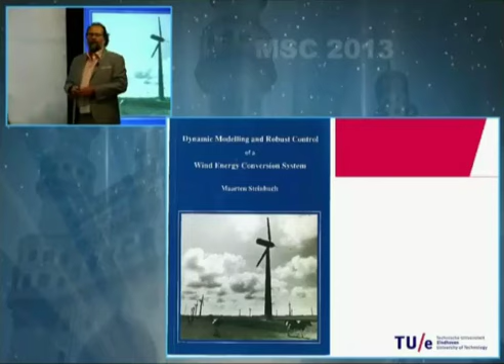After my PhD I went to Philips Research, and started to work there on CD players. After that I worked on wafer scanners, and in fact 14 years ago I moved to Eindhoven University of Technology, and I still work on wafer scanners because that has become a booming business, especially for our field of control, because they really need us. In addition, I did a lot of other applications within my group, like electron microscopes, robots for care and cure. We are also doing activities in my group on energy management and design of hybrid powertrains for trucks and passenger cars. So I will be talking about smart vehicles and also connected vehicles, and I will say a few words about plasma fusion as a new activity in my group.

Now, when I started to work with Philips, they asked me, in the late 80s, to develop possibilities to increase the data amount and data readout speed of CD players from nominal speed, audio, up to 4 times at that time, for the usage of CDs in computer applications.

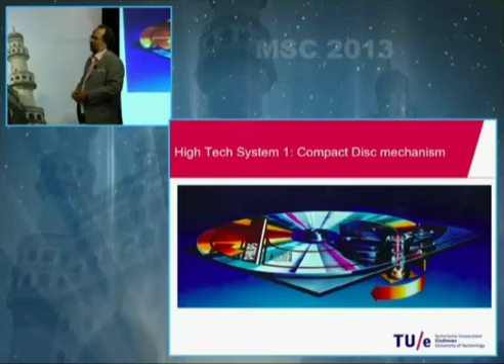The problem is that if you have a track following system, because the CD player typically has to follow the track and the focus - these are two typically controlled mechanisms. On top there is a lens system, and there are coils around the lens and a magnet close to it, so you have a voice-coil actuator and you can control that position. You measure the errors via the laser, and then you have a feedback loop closing that.

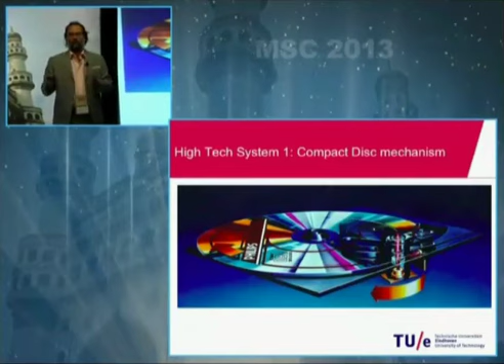Now if you speed up the disc, your set point spectrum is also amplified with a factor 4 in frequency scale, because you simply spin up the disc 4 times. You cannot measure the actual set point, because that's the absolute position of the disc in space. So you can only measure the error, meaning you cannot apply feed forward, only feedback. So if you increase speed by 4, the bandwidth should normally go up by a factor of 4. If the bandwidth typically is about 600 Hertz at that time, you can see what the problem is.

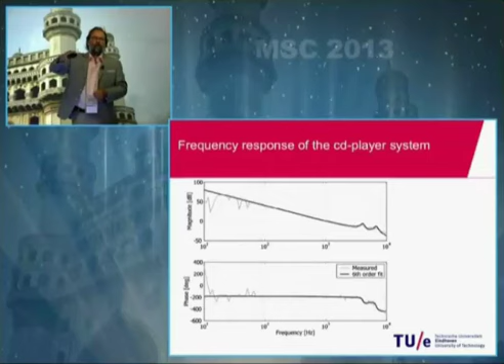This is the Bode plot of the open loop response of the radial tracking: voltage into the actuator, which means current, which means force, and then you measure position relative to the track, which means the law of Newton, F equals m times acceleration. So in the Bode plot from force to position, you basically see a -2 slope, 40 decibels per decade, and at higher frequencies you see resonances.

Now you can imagine, the X scale is in Hertz, if you have 600 Hertz bandwidth and you multiply that by 4, you would have 2400 Hertz bandwidth, somewhere here, somewhere here, and then you are so close to flexibilities that you basically cannot do that with any robustness anymore, even if you apply sort of wide notches, then you lose too much phase.

So we were asked to be more clever than PID controllers, and then I started to work on H infinity and mu synthesis and modeling uncertainties and all the things. But at a certain time I took a more

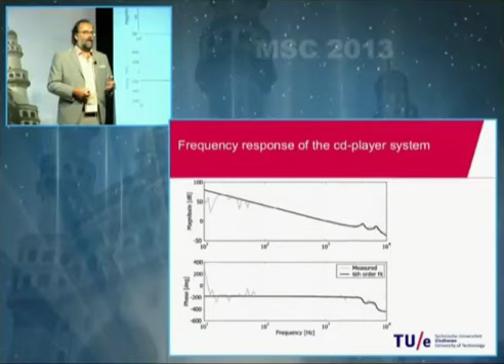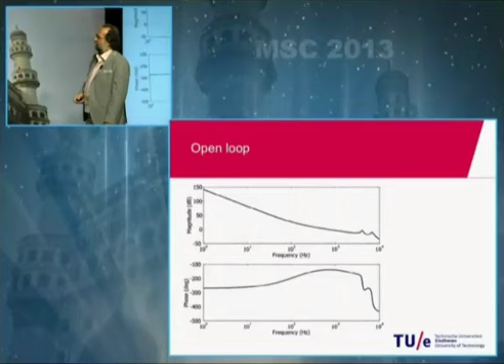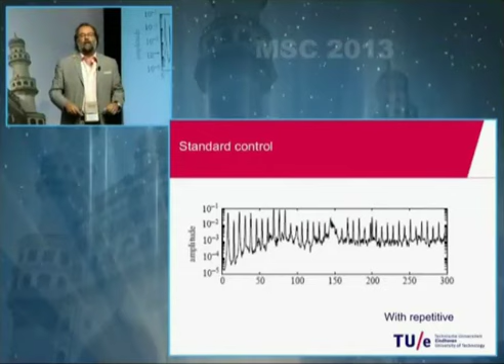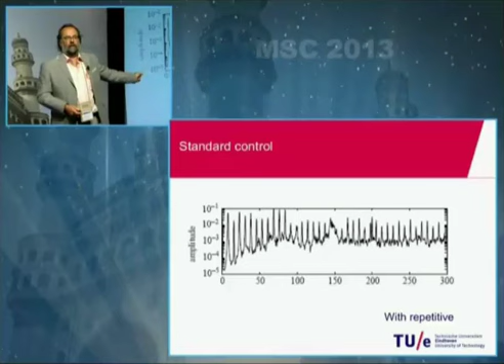So you will see a lot of higher harmonics, at least 20 harmonics. Now the PID controller did not make use of this knowledge, which is very stupid if you look at this spectrum, right? So what we developed then, and of course it was already known in literature before that time, I did this in '89 or '90, is to apply a repetitive controller, right?

The ball game is only to look at the error spectrum and try to learn from the data of your system. Now that brought me also very close to fighting basically the Bode sensitivity integral, because this is what limits our capabilities as control engineers. You have to obey this law for relative second order systems or more, for any causal system. And for linear systems it's well described using frequency domain terms, but for nonlinear systems which are causal, of course, similar things should hold.

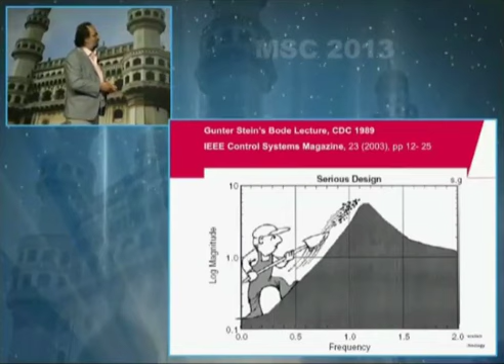The Bode sensitivity integral is central in my work and the lines of research I developed. It's good for us every day to think about the basic principle of feedback, which is the principle of high gain feedback.

Given a plant and a disturbance, the open loop response is G times D. If you close the loop, the closed loop response from disturbance to Y is the process sensitivity: G times 1 over 1 plus GK, which is the sensitivity. If you have high gain, at least below the bandwidth, GK is much larger than 1, so this is approximately 1 over K. The higher the gain, the smaller the output, and ultimately it will be 0.

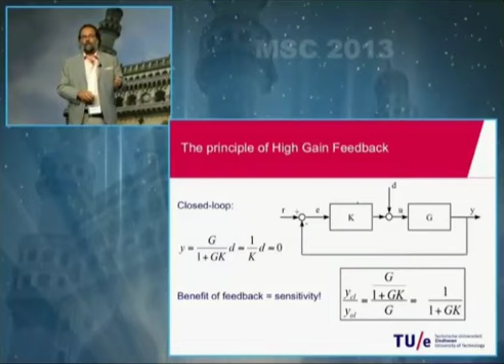This is the principle of high gain feedback, and the benefit of feedback. The ratio of the closed loop expression over the open loop expression - G was the open loop, this is the closed loop - if you divide the two, you get the sensitivity function. The sensitivity function exactly gives you the benefit of the feedback you designed. If it's smaller than 1, you've done a great job. If it's larger than 1, you're stupid to apply feedback.

Looking at this plot, the area above 1 is not good - you amplify disturbances, we all know this. We cannot stop the controller there, that would be an unstable system. So the controller works for all frequencies, and whenever we improve performance at low frequencies, it deteriorates elsewhere. The whole game is to get the sensitivity dirt from one place to another where it doesn't hurt because you don't have disturbances there. That's why disturbance analysis is key.

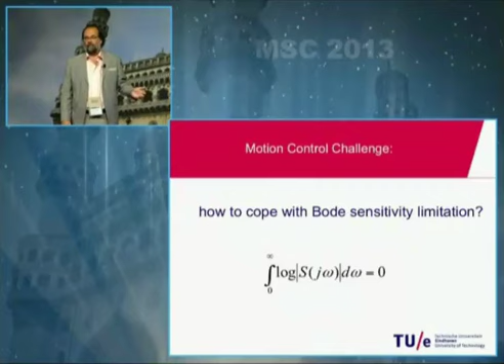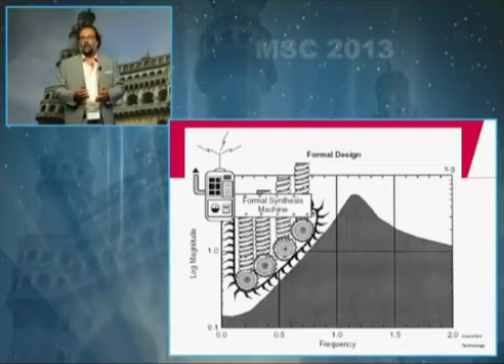One thought is how to cope with this Bode sensitivity - can we in fact beat Bode, can we crack this law, can we circumvent this? Some people in the 80s thought H infinity or LQG would solve all problems, which is not true. If you use an observer, it's simply a filter, you have to obey Bode sensitivity. So an LQG or H infinity design also uses the Bode sensitivity or has to cope with it. It's more formal, you can play with weighting functions, but the trade-off you have to make is exactly the same.

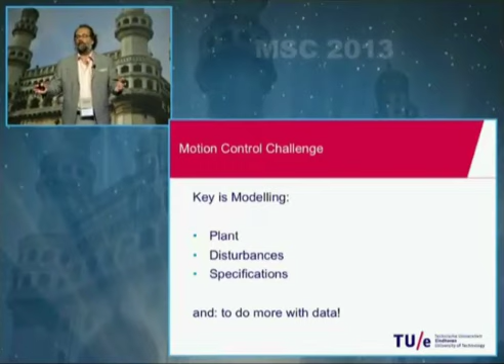What I learned in my time at Philips, working with real applications, is that in academia we put too much focus on plant modeling, restricting the definition of plant to the system to be controlled. But we should include specifications modeling and disturbance modeling - there's too little literature about how to do that. And also to do more with data. It's so cheap to do experiments with motion systems: if you have a sampling frequency of 10 kilohertz, 1 second gives you 10,000 data samples. In process industry, one step response takes half a day. So for motion systems, it's very cheap to use data.

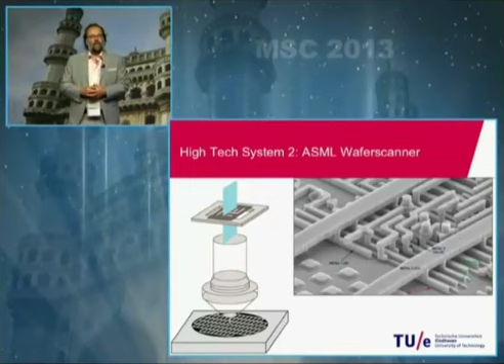Now I want to skip to ASML wafer scanners as an example where we use all these insights, and I'll show you one of the most relevant issues we are currently coping with. A wafer scanner is used in chip manufacturing, and I have a nice movie about it. I hope the sound will work.

What you see in the movie is basically the making of a chip. You take a silicon structure and make slices of that - you call them wafers. You put them into a machine and do a lithographic process. It's a scanning motion, and during that motion, the image from the upper part of the machine, the original...

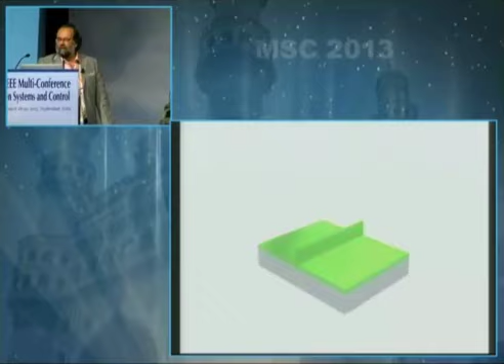Yes, that's the sound, that's good. It's not relevant for the rest, but it's something. If you keep the volume, I will play with the volume. Okay, I need the sound later on for other videos.

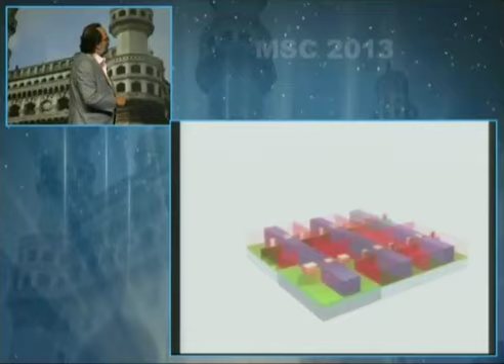This is the building of a 3D structure into chips. These structures are becoming more and more difficult, and the specifications are really going down, down, down. For every layer, this wafer has to go into the machine for the lithographic process. If it's finished, it's taken out into a chemical system, a new layer is spread on it, then taken out of the ovens and back into the machine. That is repeated 20 to 40 times, so you take those wafers out and back in. Then you require that the chip has accuracies of nanometers - all the layers should have errors of maximally nanometers compared to each other. That's the amazing technology of wafer scanner technology.

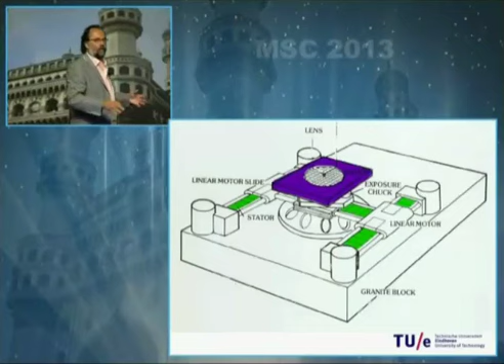It all began in the 70s in Philips Research, where people invented the so-called silicon repeater for very small wafers, like 8 centimeters, the smallest at that time, and later 10 centimeters, with 3 linear drives and an air mount for the other degrees of freedom.

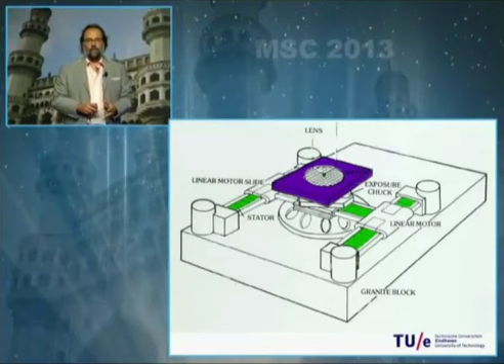And the accuracies were microns only. Then in the early 2000s, it became 300 millimeters, like this. So you need a stage of 40 kilograms. And the specifications went down from microns to nanometers.

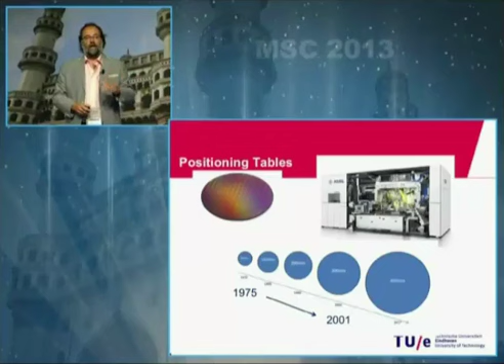And the machines ASML is making, ASML has 80% of the world market share of this kind of machine. This is a picture of the machine. It's huge, it's 6 meters by 2 by 4. It costs about $50 million, one machine. It's full of controls, and it's full of beautiful mechatronics and motion systems.

Especially the wafer here, underneath the lens. You might see this in this video. You see here a linear drive.

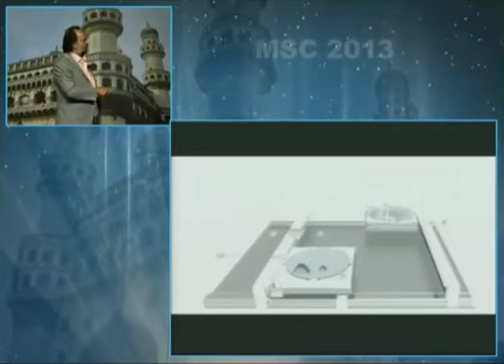The linear drive is also a 6 degree of freedom drive for the coarse stroke, and inside these stages there's a very small stroke of only 1 millimeter, and that's also again a 6 degree of freedom motion system, so with coils and magnets in all 6 degrees of freedom.

Typical bandwidth is about 500 hertz for each loop, and they achieve accuracies of 2 to 3 nanometers during scanning. And the accelerations are up to 40 meters per second squared.

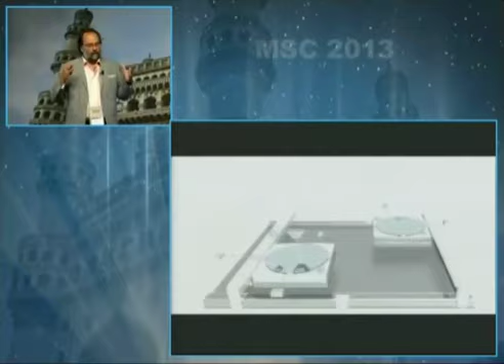And you can imagine that if this one is 40 kilos, such a stage, and you accelerate that with 40 meters per second squared, you get huge forces. And to achieve then a few nanometers servo errors, that's really a tough job.

One of the key solutions is to have a well-defined, fine-tuned feed-forward, because you know your set points beforehand. Feed-forward is key for these machines. And then also feedback, of course, is crucial for all the disturbances which are still acting on the system.

So here you see an overview of the mechanics of this system. You see the lens system, the original of the chip, which is called the reticle. It's also 6 degrees of freedom with 2 stages. And here you see the wafer stage with a balancing mass. And there are a lot of control loops here.

I don't know the total amount, but it's over 80 control loops. And each control loop cannot be seen separately because there is interaction, although they decouple the systems quite well based on physical insight and measurements.

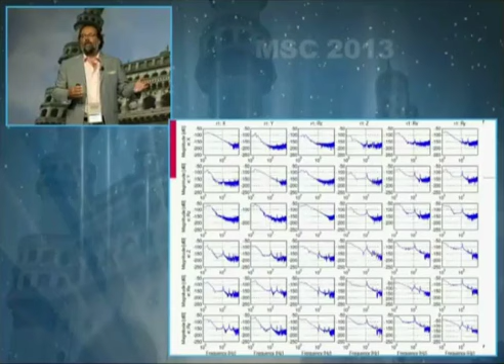So what's the challenge? Well, the challenge is that you have to cope with at least 6 inputs by 6 outputs for each stage. You have a lot of dynamics, flexible dynamics, and up to now they could get away with PID tuning per loop and some notches to keep away from the resonances, like in the CD player.

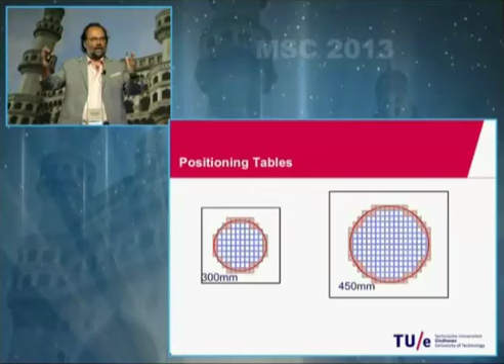However, what is currently happening is that the whole industry wants to move from 300 millimeters to 450 millimeters. So instead of this wafer, you get this wafer, and instead of such a stage supporting the wafer, you get such a stage, which is maybe 120 kilos. And they still want to have nanometers and 40 meters per second squared accelerations. So this is an immense task.

And what we foresee basically is that we have to cope with those flexibilities in a new way. We cannot simply apply notches and put them away. So what we call this is the spatio-temporal dynamics, how to control that.

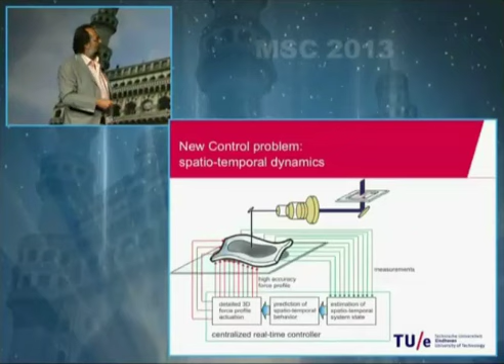And what we are investigating is to add additional actuators per stage, so not only 6 for the rigid body motions, but say 12 actuators and say 18 sensors, so that you can actually do more with feedback, that you can see more mode shapes and actively control mode shapes.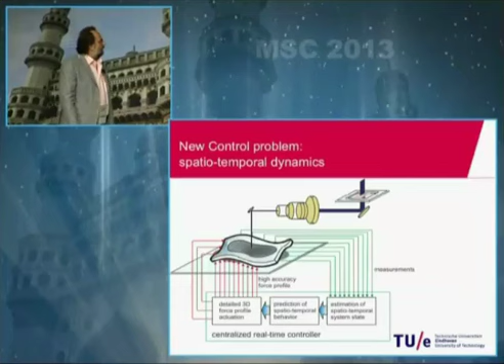Another route, and we are basically following 2 routes, is that you change the mechanics as good as possible. One of the things we research, and that's the work of Kees Verbaan, one of the PhD students, he gave a talk about this morning at this conference, is that we are researching if it would be useful to add tuned mass spring damper systems.

Tuned mass damper systems are often being used to prevent oscillations. The key thing is that to a structure, you add a very small mass, in the order of less than 1% of that huge mass. And you tune the eigenfrequency of that small mass such that the largest deflection at that point is maximally damped by that tuned mass. However, the classical application of these tuned mass dampers is that you tune this frequency according to the frequency you want to damp.

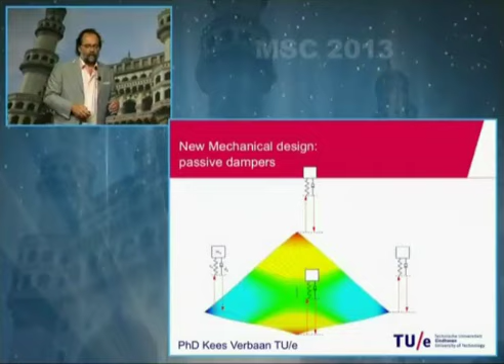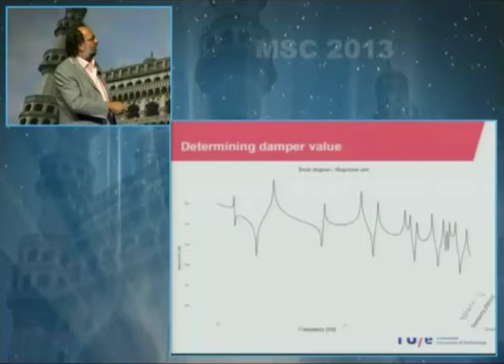So we deliberately make a very lightweight mass with a low stiffness, and the tuned mass damper has a low eigenfrequency. It's not on top of one of the eigenfrequencies we would like to damp. This is the interesting area because these resonances are non-collocated, so the phase is wrong for our feedback. These are killing us with respect to bandwidth. These we can cope with because they have a positive phase, it's collocated, right? Zeros, poles, zeros, poles. This one is killing because it's driving the phase to minus 180 additional. So we in fact want to control this one and maybe this one.

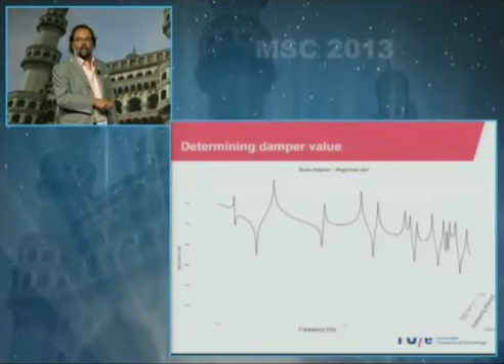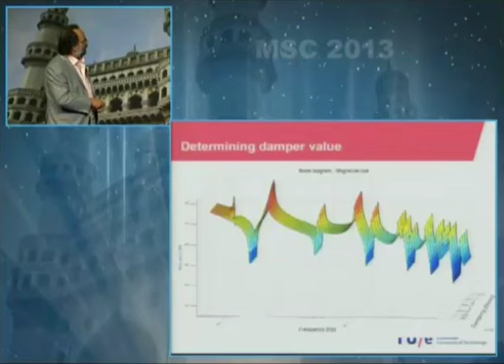Why do we put the damper here? Well, what is interesting, if we increase the damping of this tuned mass damper much more than the critical damping, you might see that first we damp its own resonance, but if we further increase the damper, and normally nobody does that, you see that the higher modes are being damped. It's really a strange effect. But you can imagine that physically, because basically you extract energy into the damper from the motion of that point on which you have added your mass, irrespective of the eigenfrequency. If it's moving, you extract energy.

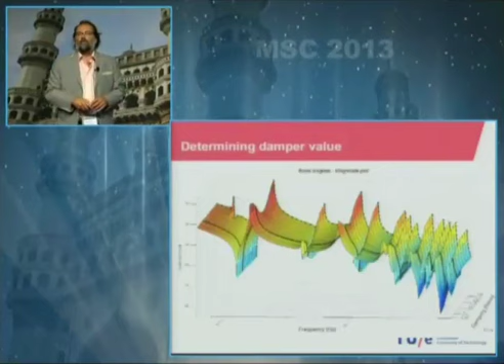And that's, if you have a high damping value, this is the damping value on the third axis, you can see you can actually damp and you can select, the black line now is the best damper value for suppressing the amplitude of this resonance and this resonance. Amazing, eh? So the next step, this is simulation, is now to make really a mechanical design for a very high damped piece and integrate that into one of the experimental systems.

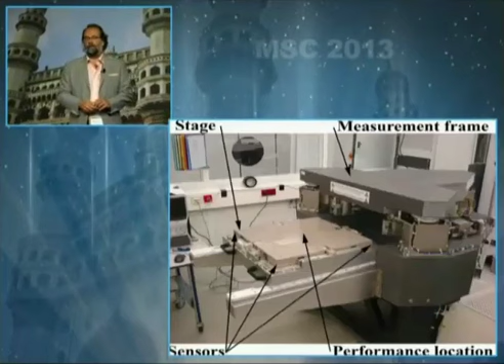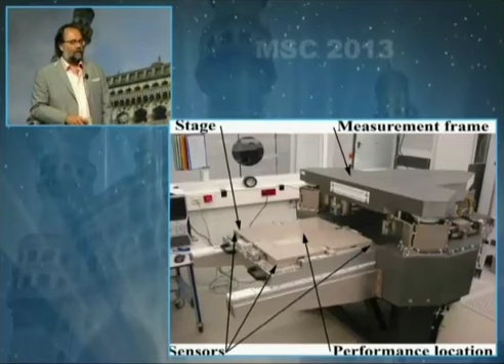This is one of the experimental systems we jointly can use with ASML. This is a stage structure for 450 millimeters, so this stage is about 600 millimeters. It contains about 12 actuators and about 18 sensors. And we are going to modify this structure a little bit with the tuned mass damper systems to see if we are right with our assumptions.

Now, once you have done your best with the mechanical design, we have the option to do the feedback. So I will give you a few examples of the feedback principles we are working on. One of them is to make use of so-called directional notch filters.

So a classical notch filter is that you have a single input, single output system and you simply have a notch filter at a certain frequency. However, if you have a multivariable system and you want to damp a certain resonance mode, this mode might be seen in, say, 4 of the 6 directions - in X, Y, and then two rotations. So if you see it in 4 directions, you might apply 4 times the same notch filter, which is then an 8th order controller. You could also modify your input-output structure, direction, so that you sort of end up with a single line, which is that mode shape.

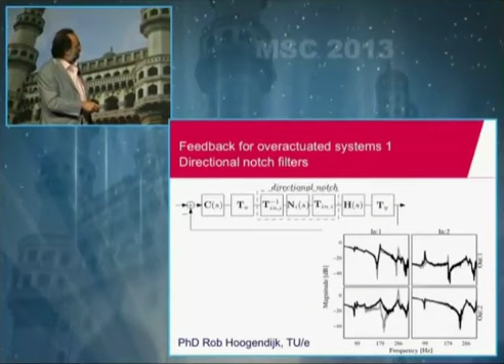And then you put your notch there. Now that's basically what we do here. Based on model information, we make input and output transformations so as to isolate that mode, and then we put a notch in, and then we close the loop, only for that mode. And you can then stack all the modes and all the notches together in addition to your standard single input, single output design. And you can see that some mode is actively damped in more than one transfer function with only one notch.

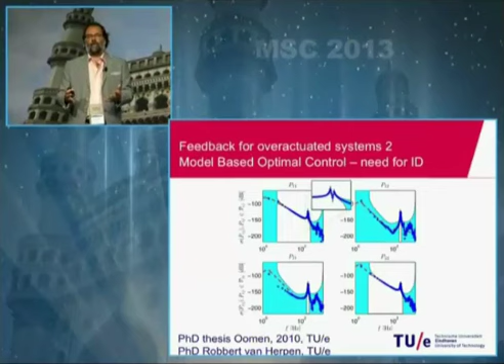Now the other one is that you need very accurate models to do model-based design. So we have in my group people working on real good system identification techniques with a control orientation. They make very nice models, very close to the bandwidth, the intended bandwidth, with even an uncertainty estimation for the rest, so that you can use that in model-based control. One of the biggest problems here is to get reliable software for huge systems. With many inputs and many outputs, with large time scales, it's really delicate to get numerical, reliable identification routines.

As I already said, for such systems, feed-forward is key. So one of the things we are also exploring is how to tune your feed-forwards whenever you have more actuators than actually needed for your rigid body. Suppose you have a stage, 6 degrees of freedom standard, but you have 12 actuators. Now 6 you use for the standard acceleration feed-forward, but then you have 6 feed-forward channels left. What to do with that?

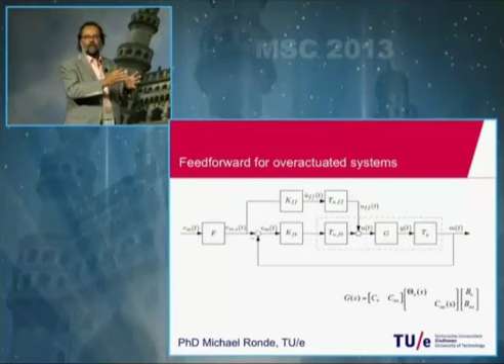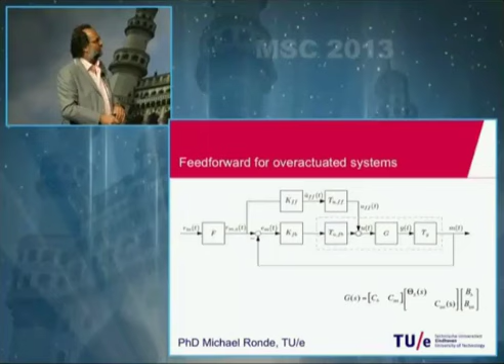One of the PhD students is working on what we call feed-forward for over-actuated systems, spatial feed-forward. We are looking for special matrices which make the direction of the mode shapes non-visible for the standard feed-forward. That's basically what you would like to do: the rigid body feed-forward should not excite your flexibilities. And you have this option if you have more inputs than rigid body motions.

Now the last example with the ASML wafer scanner I would like to show you is making more use of data. I showed you many Bode plots already, and I also stated that it is very cheap to do experiments with motion. And those systems, ASML wafer scanners, again have a sample frequency of 10 to 20 kilohertz, so it's easy to make a frequency response measurement. It's very difficult to make a good model.

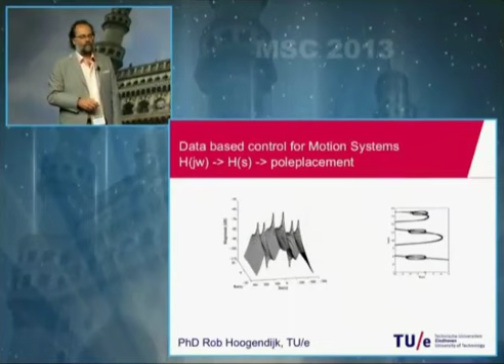He developed theory using complex function theory for how to use that to do pole placement. Here you can see a graph where he uses a feedback controller and does pole placement. He tunes the feedback controller gain, and he looks at the real and imaginary parts of this data, and he can tune such that he has maximum damping of the closed loop poles, which are calculated using a frequency response measurement of the plant. Which is quite strange, because you don't have the need for a Laplace domain model as such. Next year he will do his PhD defense.

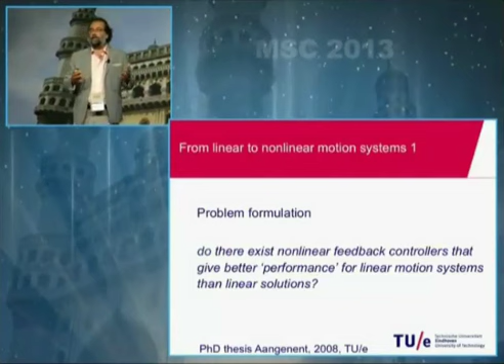Now, I already told you that I was sort of frustrated while working at Philips about the Bode sensitivity integral. So I put the following question: do there exist nonlinear feedback controllers that give better performance than linear controllers, for linear systems? Nobody is basically applying nonlinear control for linear systems other than sliding mode. But given a linear system, do there exist nonlinear controllers which do a better job than linear controllers? Well, we know if the specs are just norm-based specs, the optimal solution is linear. So apparently we should think about how to change specs, more according to practice maybe.

Now this is a very nice example. It goes basically back to the Lewis servo of 1953, but I like the example very much, and we replayed this design using LPV technique. What is the idea? Suppose you have a second order system, a mass controlled with a damper and a gain. The damper normally is taken constant, and if you take it low, you have a fast response, light blue. If you take it high, you have no overshoot, dark blue, but a slow response. So what we would like to have is a fast response and no overshoot.

What you can see is that if the error is large in the beginning, we like to have low damping, and if the error is small, we would like to have high damping. So why not make the differential action a function of the error?

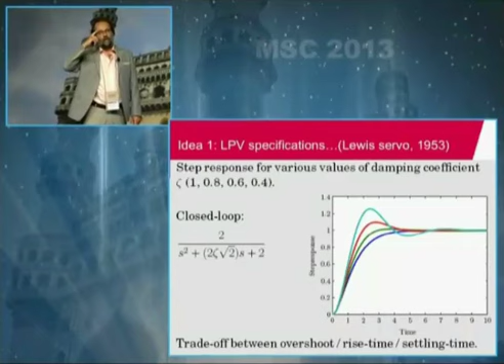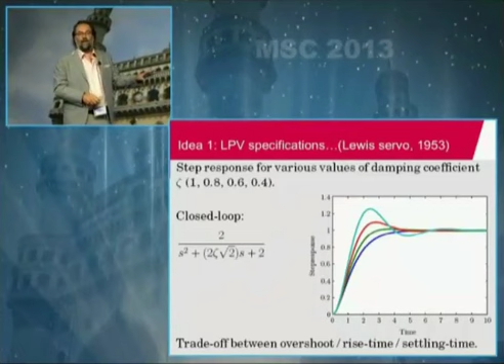What I'm doing is creating a nonlinear problem by making a nonlinear specification model. My error in the beginning has different specs than when my error is small. The plant is still linear, so you can solve this using an LPV type of problem, because basically it's LPV.

The only trick is that you have to think about how to formulate your specifications. This is LPV on a 1953 idea. This is another idea I really like, back from 1966. There were so many people so creative in it.

It's called the SPAN filter, the split path nonlinear filter. Suppose the input is the error, and you rectify the error, then you low pass it. All phase information is lost in the upper part. In the bottom part, you have a sign function, so you throw away all magnitude information, but you keep all phase information. Then you put that through a lead filter, giving you phase advance. Now you multiply the two signals, and the hope is that we would get a low pass with phase lead.

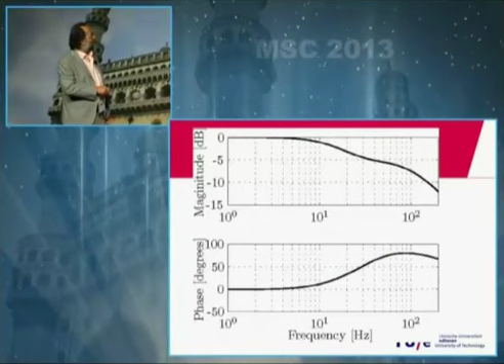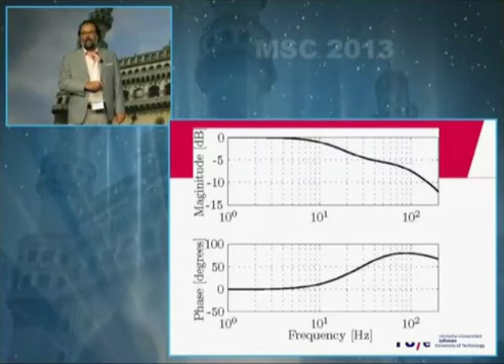Is this also true? We implemented this, and then we measured the Bode plot. This is the Bode plot of this implemented filter. It is a low pass and phase lead. This is the dream of every control engineer in practice: to make a low pass with phase lead with a stable filter.

Now the trick, of course, is this is only the describing function - this is the first harmonic. There will be many higher harmonics if you put in a sinusoid, because it's a nonlinear filter. So this only works if you apply it to a system with a low pass character. But most systems are. So we applied this to a motion system, a typical fourth order system - a motor, a flexible axis, an encoder.

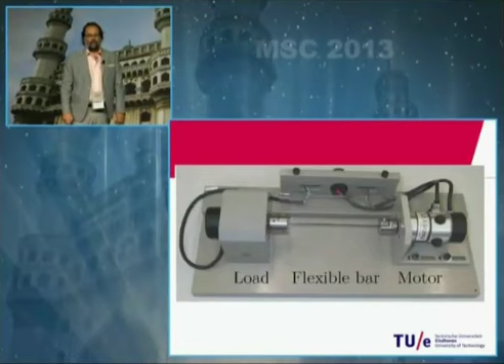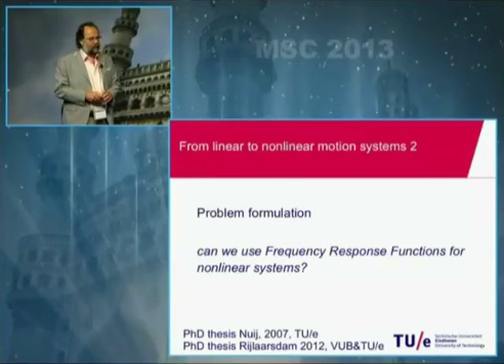Another step in that thinking is the following: can we use frequency response functions for nonlinear systems? We had a very specific problem with FEI, a company close to Eindhoven that makes microscopes, the best microscopes in the world. They can look at picometers. The problem here is not to move fast like ASML - the problem here is to move as slow as possible.

They want to move at 20 nanometers per second to scan samples. 20 nanometers per second is the same as moving to the chair next to you in 1.5 years. That's 20 nanometers per second. And what's the problem? The problem, of course, is their stages cannot be a 30 million machine - it's a 200,000 euro machine.

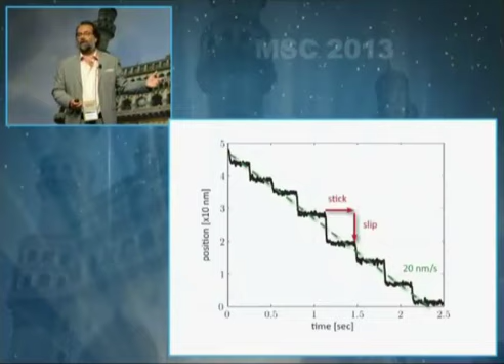So it's cheaper mechanics, so they have stick-slip. They have a lot of friction, they have piezo drives, stick-slip. This is typically what you see at 20 nanometers per second. The green line would be the ideal, and this is what you get. You can imagine that if you're an operator and you want to scan, and you see all those images coming by, that's not so nice.

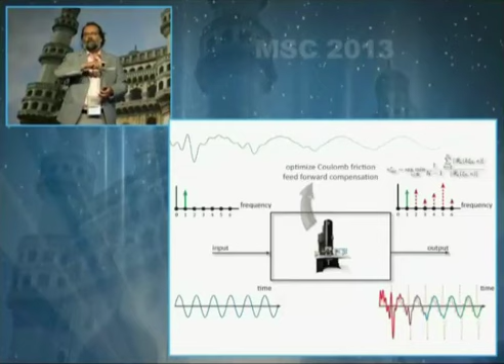So what we did is the following: we put in a sinusoid and we measured the output spectrum. Due to this friction you get a lot of higher harmonics. Now if you sum all higher harmonics, you can put it into a sort of criterion function, and we minimize that criterion function over the friction feed-forward term. So this is a means to tune the feed-forward term.

It's a very simple idea, but it works really perfectly. So you can tune your feed-forward friction term by means of using higher order responses of your plant, and you try to put them to zero. If they are zero, you know that you have cancelled the nonlinearity in your plant - in this case, the friction feed-forward. Of course, your friction feed-forward model should be compatible to reality, so that always takes time to make good friction models.

Now, this is about the standard motion systems, and I'm going to show you several applications of what things we do also. So for instance, medical scanners for Philips.

The problem here is that often they have to do a calibration to make a 3D scan from 2D images. You need a very well calibration so you know where the patient is compared to the detector and the laser. That takes a lot of money and time, maybe a whole day to do a really good calibration. Rick van der Maas also gave a talk here at this conference on Wednesday. He showed that using model-based techniques, you can sort of halve the time of the calibration by using model information.

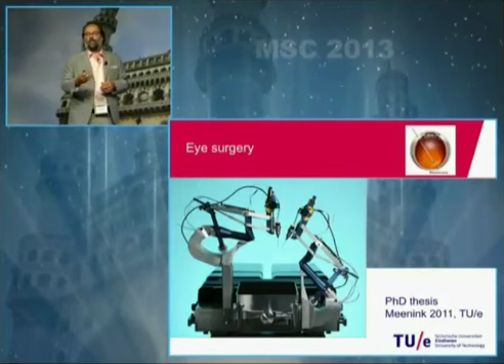In addition, at that same time frame, we started to do similar things for eye surgical operations, especially at the back side of the eye, at the retina. These are very tedious operations, and we have developed a master-slave system to support the surgeon, to scale his motions, and to also provide him force feedback. And this is our eye surgical robot, and you might see a small movie here.

So a true eye surgeon would do this better, eh? They don't shake that much. The goal here is to have 10 microns accuracy at the tip, at the backside of your eye, because they want to go into veins at the retina. And that's what we can provide with this robot. So currently we are...

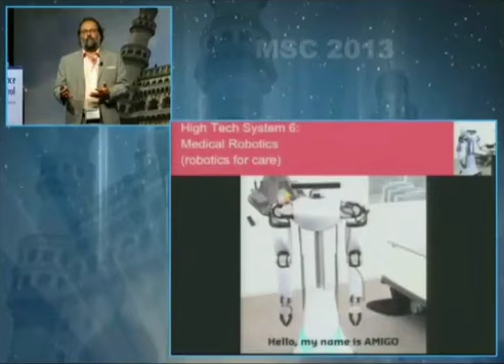It's really challenging, and we use this knowledge also to apply that in the care sector. So this is our care robot. That's a development of which we think that might be relevant for elderly people in due time. I would like to participate in RoboCup 2012 on behalf of Tech United Eindhoven.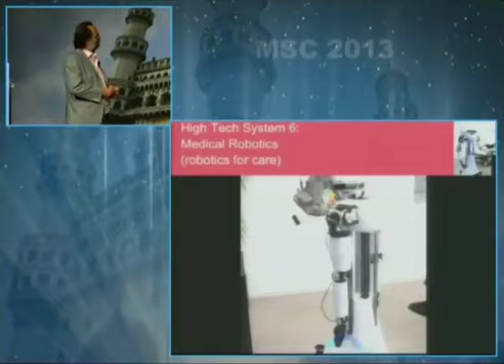So this is also one of the PhD students lying in our hospital bed, in our lab.

One of the challenges here is data and object recognition, and we are participating, or we set up a project called RoboEarth, which is sort of focused on generating a sort of a Google database, but then for robots. So every robot on Earth could upload its learned things about the environment, and other robots can use that same knowledge.

So let's make a quick step now to powertrains, because that's also a subject I really like. I think in future, cars are becoming really high-tech systems, and they will solve their own problems. So cars, they should be clean and connected, right? I often call cars nowadays iPad on wheels. A new Mercedes-Benz has 100 million lines of software code, and a Boeing airplane has only 6 million or so. So the software challenge in cars is huge.

And also the control challenge for us people. There are so many control loops in a car, that's amazing. Now my...

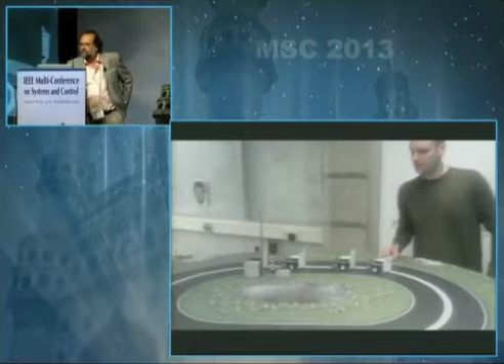Then, smart cars. I will make the talk about connected cars and platooning. You can see that here. If you have normal cars connected only via radar, basically the information you get is too late, because you only measure position, right? Now, what we showed with the previous PhD student, if you let them connect wirelessly, you can provide acceleration information to each other.

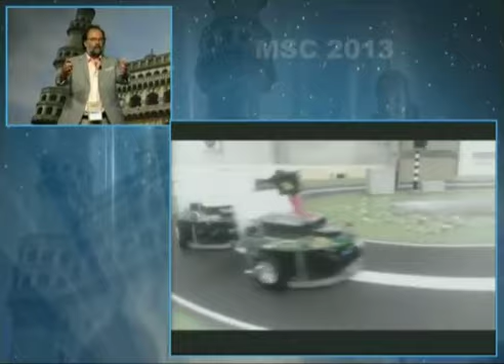And what you can see is that they stop immediately, right? That's because, in terms of motion systems, we now apply a feed forward—we apply acceleration feed forward, right? And this is so ideal. Imagine you are in front of the traffic light, it turns green, and you are fifth in a row, and everybody simultaneously starts driving. That would be so nice, right? Well, sometimes in India I think that happens in fact, but without wireless communication.

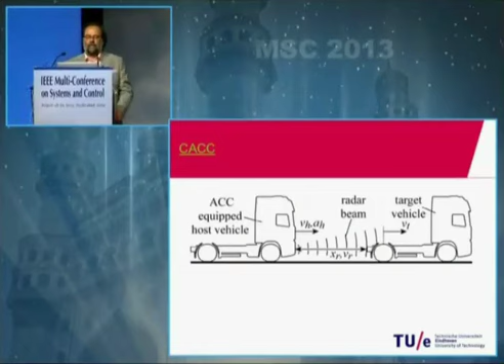So we also apply these things on the highway. That's quite unique, that we have a highway where we can test these things. But I will show you another video. I hope this all works, but we will experience this.

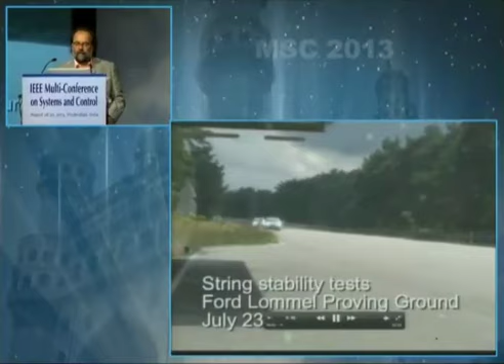So what we did here was, in the first car, there was simply a person from TNO, an engineer—we work together with TNO, that's a Dutch research institute in the Netherlands. And the follower car had my PhD student from a few years ago. That car had two options to drive: with a radar linked to the car in front, or wireless.

So we start with standard adaptive cruise control. What does it mean? You use your radar to give gas or brake. So my PhD student only needed to steer—no touching the brake, no touching the gas pedal. What you can see basically is that the distance should be kept quite large, because if the first car brakes, it takes some time before the system realizes, hey, the position is becoming smaller, I have to brake as well. You can see that here: if the first one brakes, the following car makes the space smaller before it actually automatically brakes.

If you want to solve the mobility problem—and you have that as well here in India as in the Netherlands, we are very crowded in the Netherlands—you want to pack more cars on the highway. So here we made the distance smaller. And then you have a problem, of course, because this is a little bit tricky: if the first car immediately brakes and the second car only sees that too late by using feedback based on position.

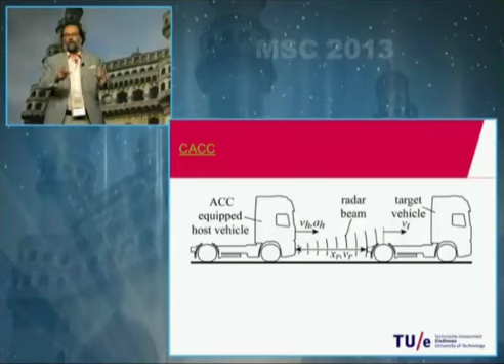I think this is the first step towards practice of platooning, because platooning isn't necessary with 100 cars—you can do that with only 2 cars or other combinations of cars.

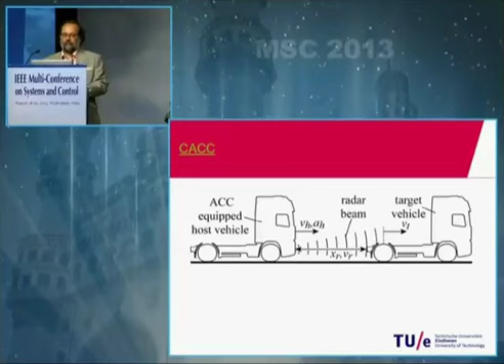I'm almost finished now, so let's see if this is going to work again. My last few slides are about ITER. We work on plasma control. Why is that fun for control engineers? Basically because they need us—they're physics people, they know about the plasma, but they don't know how to control a machine. And we do. There are huge control problems in plasma fusion.

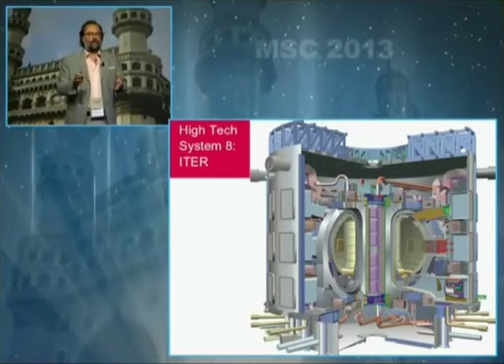Typically we can measure magnetic islands, as they're called—local turbulence in the plasma. You have a steerable mirror; that's how I got involved, because they had problems with feed-forward on the mirror and asked me. I said, okay, nice, the mirror, but how about the plasma? Because that's also adding dynamics to our feedback loop. That was about 6 years ago, and since then I've been quite successful cooperating with the physics people.

I now have about 6 PhD students in my group doing this. One of them, Rick van der Maas—sorry, Matthijs van Berkel—will give one of the last talks of this conference. Please don't run away to the airport, but go to the last talks, because it will be so frustrating for them if there's nobody in the audience.

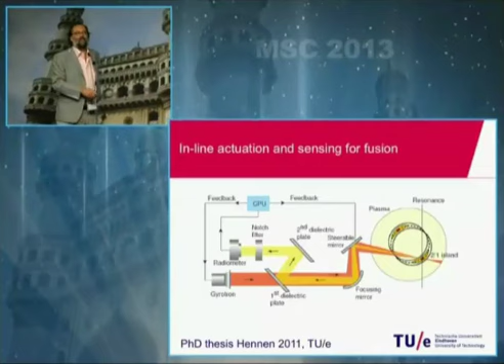We also apply vision in the loop, quite nice, because we learned this from our soccer-playing robots—how to use vision in real time. We now apply that to control the edges of the plasma, doing edge detection using cameras, which is cheaper and easier than using all the magnetic sensors they currently use.

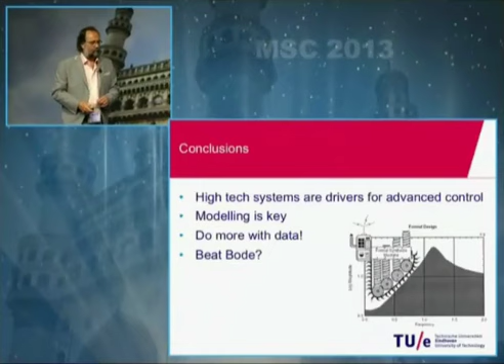That brings me to my conclusions. I've shown you that high-tech systems are drivers for advanced control, especially in our region—ASML wafer scanners, but also the microscopes and X-ray systems of Philips Medical. Modeling is key, also of your disturbances, and do more with data—if data is cheap, use it, don't rely only on your model. I've shown some examples where I think we have beat Bode, but there's still a lot of work to do. I want to thank all my collaborators, PhD students, and other people.

And I want to finish with this nice video with sound.

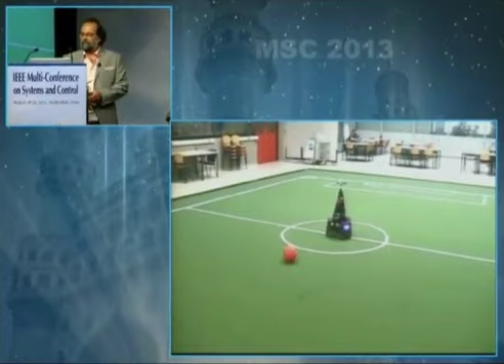Whoa! Whoa! Whoa! There you go. Oh no, you just go. Oh my God! Oh God! Oh, shit. Oh no, what is that? Oh shit. So work should also be fun, right? Thank you.

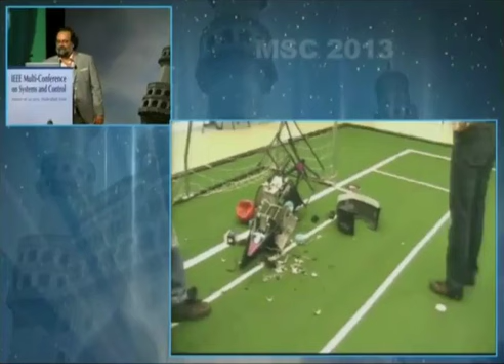Well, I guess that was a talk that was clear beyond question. So...